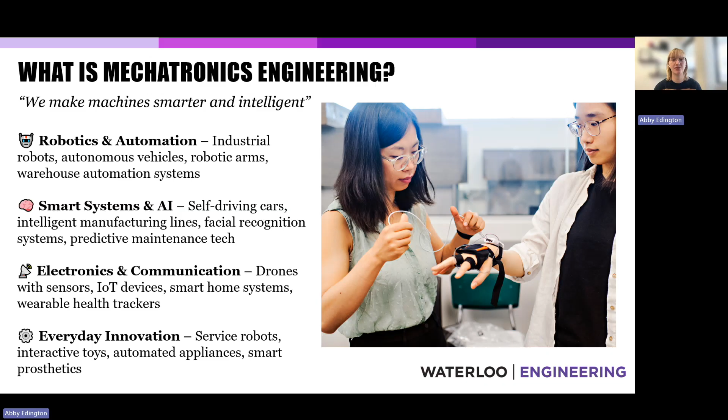So, what exactly is mechatronics engineering? Mechatronics is a multidisciplinary field that brings together mechanical, electrical, and software engineering to design smart, automated systems. If you're interested in robotics, autonomous vehicles, wearable tech, or intelligent manufacturing, this program is designed to take you there. A simple way to think about it is we make machines smarter. Mechatronics engineers don't just build devices, they integrate hardware and software so that systems can sense, think, and act. It's this combination that powers everything from self-driving cars to surgical robots to smart home devices.

Waterloo's Mechanical and Mechatronics Engineering Department is the largest of its kind in Canada, with 68 full-time professors and expertise across a wide range of exciting fields. For example, we have leading research in additive manufacturing, autonomous vehicles, green energy, and assistive technologies like exoskeletons.

Our RoboHub is a unique multi-robot facility, one of the only ones in the world to bring together ground, aerial, humanoid, and magnetic levitation platforms under one roof. From advanced robotics to micro-electromechanical machines, the work happening here is pushing the boundaries of what's possible.

The Mechanical and Mechatronics Engineering Department at the University of Waterloo is committed to fostering a positive and supportive learning environment. One unique feature of the program is its cohort system, where students take courses with the same group of approximately 90 to 120 classmates throughout the entire degree. Cohorts typically remain in the same classroom for lectures during the day, helping to build strong connections and a close-knit academic community. Hands-on learning is embedded throughout the curriculum.

In first year, students participate in the Engineering Ideas Clinic, where they begin developing practical engineering skills through structured design challenges, prototyping exercises, and experimentation. As students progress throughout the program, they gain experience with machining, measurement tools, control systems, and lab-based investigations across areas like thermodynamics, fluid mechanics, materials, and manufacturing processes.

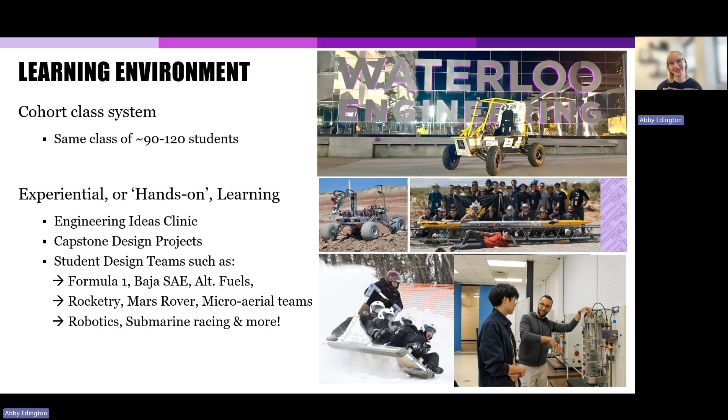From the very beginning of the program, students in mechatronics engineering are engaged in hands-on learning. In MTE 100, the introductory course taken in first year, students begin designing, building, and testing real devices. The course challenges students to solve open-ended problems, such as creating machines that can sort balls by color and weight, or programming and assembling mobile robots that can navigate a course and interact with their environment.

These projects require that students apply their growing knowledge of mechanical systems, electronics, and programming in a collaborative team-based setting. It's a great example of how students start developing practical engineering skills early on, while also learning how to prototype, test, and iterate like a real engineer.

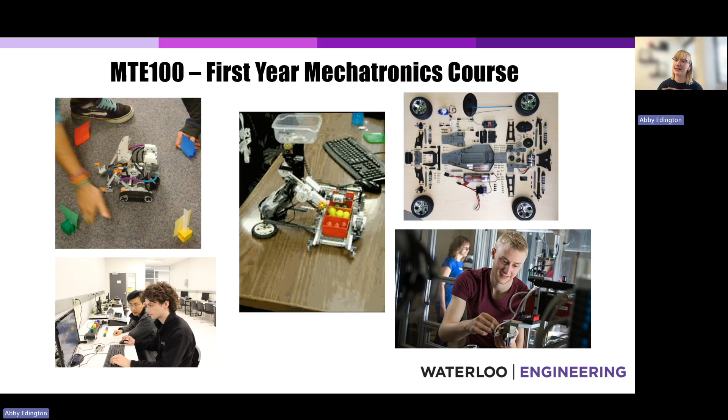In fourth year, all engineering students participate in a capstone design project. Working in teams, students identify a real-world problem and design a solution to address that need, applying everything they've learned throughout their degree. This work culminates in the design symposia, where students publicly present and demonstrate their projects to classmates, faculty, industry partners, and community members.

Projects span a wide range of industries and challenges. Past examples include robotic hockey stick testers, drone applications for package delivery, automated greenhouse systems, and assistive technologies for individuals with vision impairments. These projects are an opportunity to showcase not just technical and design skills, but also communication, creativity, and teamwork. For many students, it's one of the most rewarding and memorable experiences of the program.

So let's get into what you'll learn in the mechatronics engineering program. In the first year, students build a strong foundation across several core subject areas that support the multidisciplinary nature of the field. Courses in mathematics and science include calculus, linear algebra, and chemistry, which provide the analytical tools needed for engineering problem solving. In the Introduction to Mechatronics Engineering course, students are introduced to engineering design, control logic, CAD, sensors, actuators, and basic project planning, giving them early exposure to mechatronic systems.

Students also take courses in computing and digital systems where they learn basic programming, algorithms, and digital computation, skills essential for automation and software control. In mechanics and materials, students explore statics and material properties, learning how mechanical components behave under different conditions. Finally, in electrical circuits, students study the fundamentals of circuit analysis and electronic components, such as resistors, diodes, and transistors.

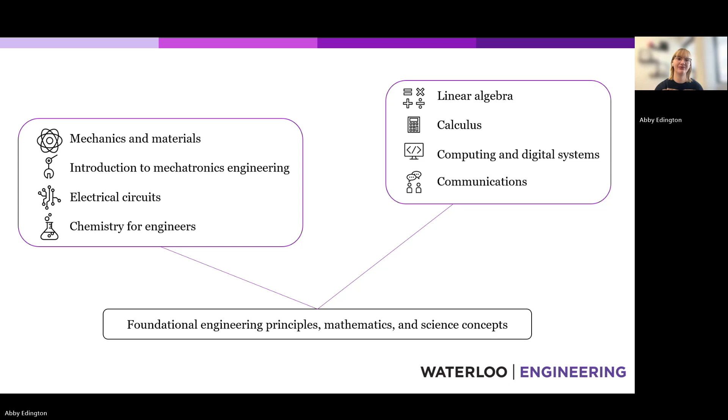So let's explore the four core areas of mechatronics engineering, starting with mechanical engineering fundamentals.

This area lays the groundwork for understanding how physical systems behave, which is essential when designing and integrating mechanical components into smart automated systems. Students begin with statics and dynamics, learning how to analyze forces on stationary items and how objects move under various forces. These concepts are foundational for designing reliable mechanisms in robotics and machines.

Next is mechanics of deformable solids, where students study how materials respond to stress, strain, bending, and torsion. This helps in designing components like shafts, brackets, and support structures that are safe and efficient.

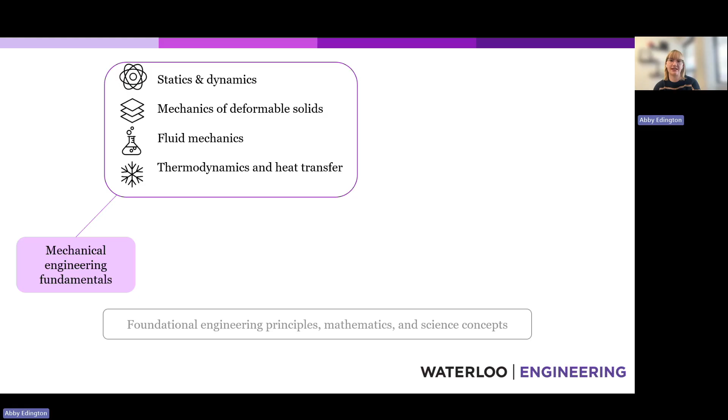Courses also include fluid mechanics, which explores how liquids and gases move, which is important for systems involving pneumatics, hydraulics, or cooling. Finally, thermodynamics and heat transfer help students understand how energy and heat move through systems. These principles are crucial for energy efficiency and thermal management in devices like motors, processors, or power electronics. Altogether, mechanical engineering fundamentals give students the essential tools to design and analyze the physical side of mechatronic systems.

The second core area in mechatronics engineering is electrical and electronic engineering. This area gives students the tools to design and integrate electrical systems into mechanical devices, making systems smart, responsive, and automated. Students start by learning circuit analysis and electronics, including voltage, current, resistors, capacitors, and transistors.

These concepts are the foundation for building systems that interact with sensors, actuators, and microcontrollers. Next, students explore digital logic and microprocessors, where they learn how to program microcontrollers, use communication protocols like SPI and I2C, and build embedded systems that control mechanical hardware.

The program also covers sensors and instrumentation, which is key to collecting real-time data from a system or environment. Students learn how to select, calibrate, and interface sensors with digital systems to provide accurate feedback.

In actuators and power electronics, students study how electrical energy is converted into motion through motors, servos, and motor controllers. They also learn how to manage power flow and techniques like pulse width modulation and H-bridge circuits.

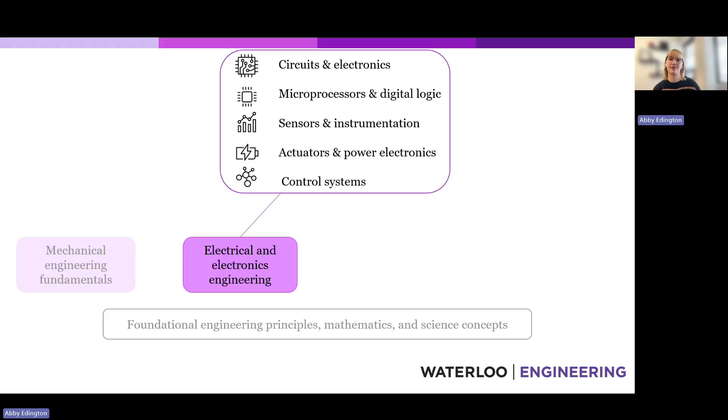Finally, students take on control systems, learning how to use feedback to regulate system behavior. This includes PID control, system stability, and how to implement control algorithms in embedded software. Altogether, these topics equip students to design intelligent, responsive systems, ranging from robotic arms to autonomous drones and smart consumer devices.

The third core area in mechatronics engineering is computer science and software engineering. This area provides the tools to design and implement the software that controls mechatronic systems, bringing together the hardware, electronics, and intelligent behavior. Students begin by learning programming and embedded development using languages like C, C++, and Python.

They gain experience writing code that interacts directly with hardware, reading sensor inputs, controlling actuators, and managing real-time responses. They are also introduced to software engineering principles such as modular design, object-oriented programming, version control, and debugging. These are essential for building complex, reliable systems like autonomous robots or automated machinery.

In algorithms and data structures, students learn to write efficient software, handling data, optimizing system performance, and solving problems like pathfinding or real-time decision-making in robotics. Courses also cover control algorithms and real-time systems.

Students implement control logic like PID controllers or Kalman filters on embedded systems, ensuring that their code responds accurately and within strict timing constraints. Communication is another key focus.

Students learn to implement communication protocols and networking, such as SPI, I2C, Bluetooth, or Wi-Fi, to connect components within a system, or remotely control devices through the cloud or IoT frameworks.

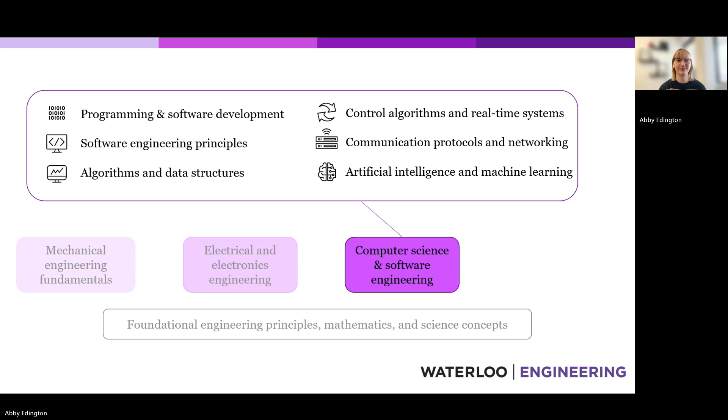The fourth core area in mechatronics engineering is mechatronics integration. This is where everything comes together. So students learn how to combine mechanical components, electronics, and software into a complete intelligent system.

A major focus is on embedded systems and real-time computing. Students program microcontrollers like Arduino or STM32 to control sensors and actuators, and they work with real-time operating systems to ensure fast, predictable system responses.

In sensors, actuators, and control systems, students integrate data from devices like IMUs, LIDAR, or temperature sensors, and use that information to control motors or pneumatics using feedback controllers like PID or more advanced methods.

Hardware-software co-design is another key area. Students design interfaces that allow electronics and software to work seamlessly together, sometimes using FPGAs or DSPs to accelerate processing.

The program also explores robotics, automation, and industrial IoT. Students apply tools like computer vision, motion planning, and wireless protocols to build smart, autonomous systems for manufacturing or connected devices.

Finally, in mechatronics system prototyping and testing, students bring their designs to life using 3D printing, PCB design, and simulation tools to build and validate their systems, ensuring they're reliable and ready for real-world use. This integration work is at the heart of what makes mechatronics unique, blending hardware and software into systems that think, sense, and act.

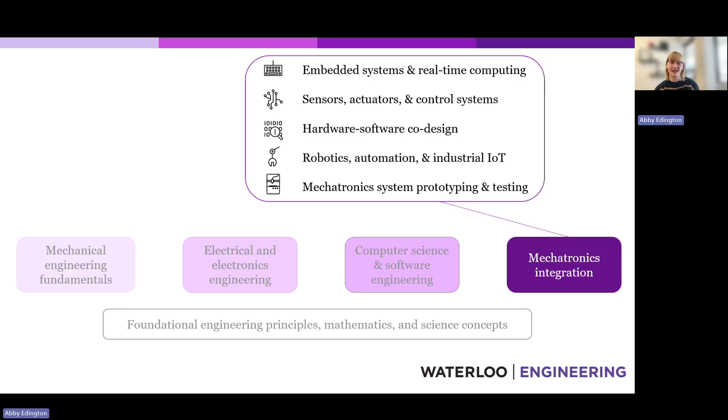In the upper years of the mechatronics engineering program, students move beyond the fundamentals and begin working on more advanced interdisciplinary challenges. These courses and projects bring together everything they've learned: mechanical design, electronics, software, and control, to tackle real-world problems using emerging technologies.

Students gain experience designing intelligent systems that can move, sense, and make decisions in real time. This includes technologies used in autonomous vehicles, collaborative robotics, wearable health devices, and smart manufacturing systems.

There's also a focus on integrating artificial intelligence, ensuring secure and reliable operation in networked environments, and optimizing embedded systems for energy efficiency.

The goal at this stage is to prepare students to innovate in fast-moving fields, whether that's building safer human-robot interactions on the factory floor and enabling smart automation, or contributing to the development of next-generation medical and biohybrid systems. These advanced topics allow students to deepen their expertise, explore areas of personal interest, and position themselves for impactful careers in research, industry, or entrepreneurship.

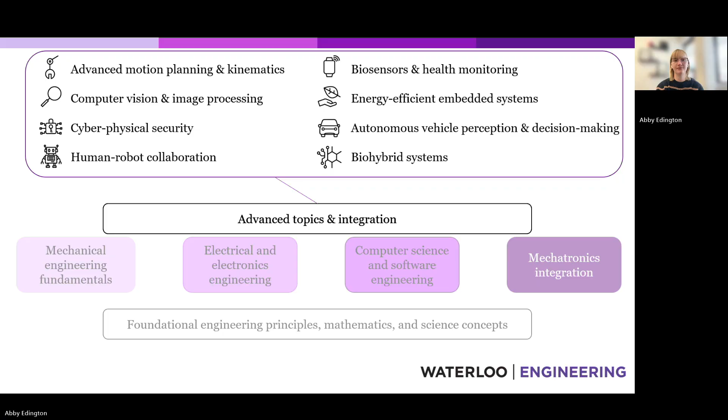While the mechatronics engineering program does not offer formal specializations, students do have the opportunity to customize their degree by pursuing an option, which is a focused set of courses in a particular area of interest. Options are open to students across the Faculty of Engineering and typically involve completing 5 to 8 courses.

Some of the most popular choices for mechatronics students include artificial intelligence, computing, and software engineering, as these align closely with the digital intelligence systems focus of the program. However, there are 13 options in total, covering a wide range of fields from biomechanics and environmental engineering to entrepreneurship, quantum engineering, and management sciences.

Choosing an option is entirely optional, but it can be a great way to explore a secondary interest or align your degree with a specific career goal in emerging tech, business, or interdisciplinary areas.

Just like in all of our engineering programs, students in mechatronics engineering at Waterloo participate in our paid co-op work program throughout their degree. Over the course of 6 work terms, students gain up to 2 years of paid work experience, applying their skills in real-world settings while building strong industry connections.

Mechatronics students work in a wide range of roles, which span software, hardware, robotics, automation, control systems, and even product management. These roles often involve developing intelligent systems, designing embedded hardware, writing control software, or supporting full product development cycles. The variety of co-op jobs reflects the interdisciplinary nature of the program and gives students the flexibility to explore different career paths, whether it be in startups, large tech companies, research labs, or advanced manufacturing.

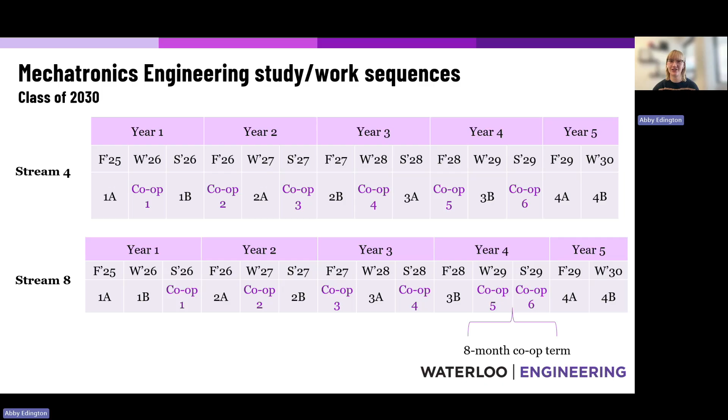These career paths span multiple industries, including automotive, aerospace, robotics, consumer electronics, and healthcare. This means you're not limited to one sector. Mechatronics engineers are in demand anywhere technology is advancing.

For students interested in further specialization or research, many graduates choose to pursue graduate studies through programs like a Master of Engineering, Master of Applied Science, or even a PhD. These advanced degrees open doors to roles in research, academia, and highly specialized engineering fields.